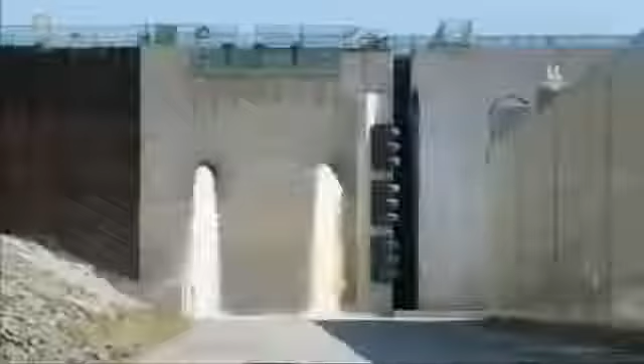Your next vacation may be spent in a paradise you've never heard of. You'll just need a way to get there. Here's the catch. That way has to go underwater. It would become the deepest immersed highway on Earth. Oh, they also have to build a couple of bridges. And did we mention the typhoons?

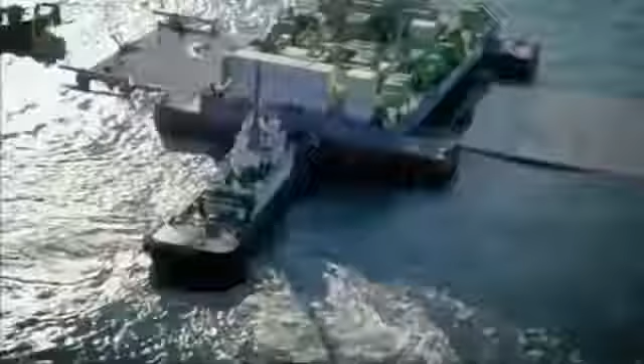These tugs are towing a contradiction. A tunnel segment that's both colossal and fragile. Come back, close. Slow down. A raft of techno breakthroughs and untested results. Bound for a place few know, to entice the world to visit. And even sway the choice for the Olympic Games.

Busan is South Korea's second largest city. 4.2 million people. Bigger than Madrid, closing in on Milan, and as hectic as Manhattan. South Korea is an Asian tiger, and Busan makes it roar. Its skyline will soon include one of the world's tallest buildings. It's the nation's biggest port, and the 5th busiest in the world.

Every 3 seconds, they unload a container. It's so busy, they had to build the sprawling Busan New Port. And still, Busan grows. Busan is such a comer, it's bidding for the 2020 Summer Olympics. But Busan has one big problem, and it's on display here at one of Asia's biggest fish markets. Dozens of vendors cram in here, 14 hours a day, every day of the year. And that's the trouble with Busan. It's so crowded, it's running out of room.

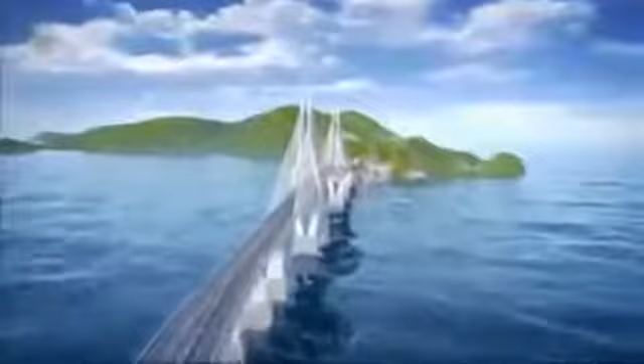The Busan-Geoje Fixed Link. A 4-lane highway that runs nearly 50 meters beneath the sea. Then it leaps across 2 colossal cable-stayed bridges. Altogether, longer than 80 football pitches. One of the biggest infrastructure projects in the world. Plunging 48 meters below sea level, the link will boast the deepest immersed roadway in the world.

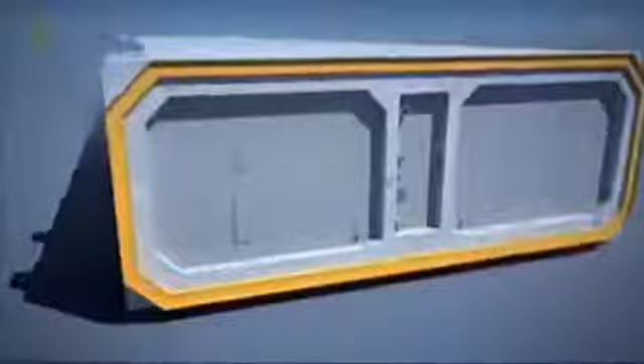The tunnel will be composed of 18 mammoth segments, each as long as 2 football pitches and as heavy as an aircraft carrier. Wide enough to carry 2 lanes of traffic each way, with an access tunnel between. That's the concrete reality. Now, here's where it gets dicey. Each segment has to be carefully towed into position, then carefully sunk to the seabed. And all the segments have to align within 35 millimeters, less than a thumb's width.

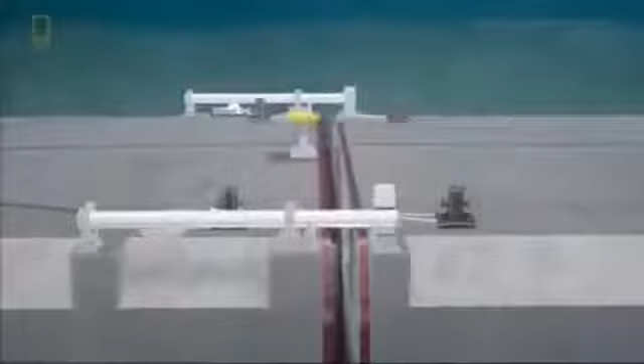Weather adds its own demands. This site is exposed to the open sea. There are always high waves, and the water is deep as well. It is wide open to the Northwest Pacific Ocean, so we have extreme exposure conditions for the construction period. So we've got to be ready for whatever that sends us, like big swell waves, strong winds, and even occasional typhoon.

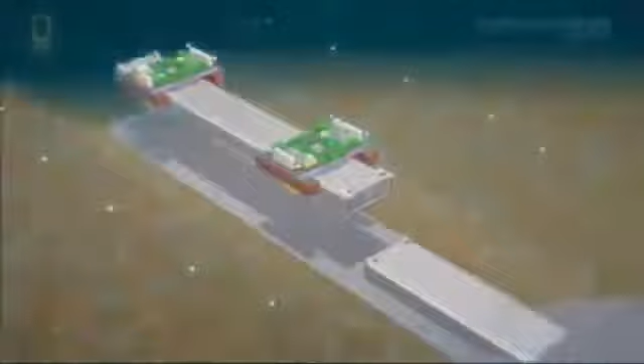Building a tunnel like none ever seen will take techniques like none ever tried. Yet the Koreans have never built an immersed tunnel. But this country has. The Dutch have 5 centuries of experience at holding back the sea. De afzinken van tunnels. Tunnel immersion is actually a Dutch speciality. If you look at the number of immersed tunnels in the world, most of them are in the Netherlands.

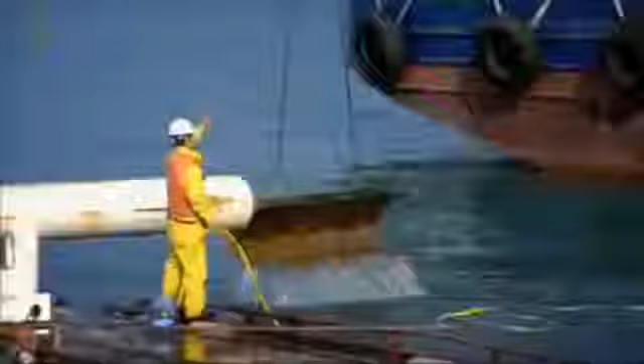Construction begins with the tunnel entrances. One on Gaduk Island, the other near an uninhabited island. From here, engineers will dig down to 12 meters below sea level to meet up with the undersea tunnel segments. But they won't tunnel through the seabed itself. If they did, the gradient would be too steep for driving. Instead, Peter's crew will lay prefabricated tunnel segments on the seabed.

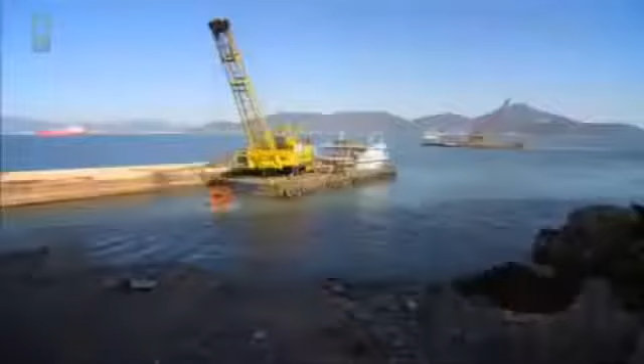First, engineers dredge a trench where the tunnel will rest. To buttress the foundation, they bore concrete columns into the seabed, stopping 3 meters shy of bedrock. The reason? Earthquakes. Avoiding bedrock will give the tunnel crucial flexibility. The segments will rest on a bed of gravel to ensure an even surface.

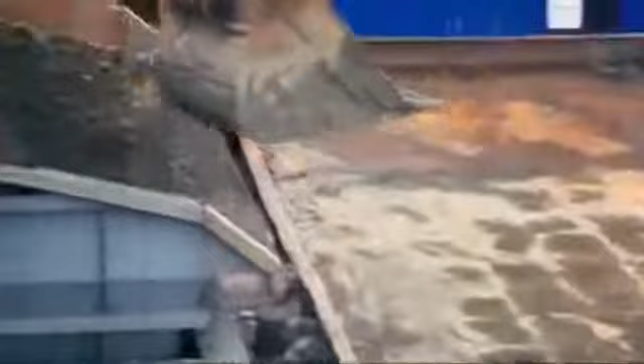Because the bed determines the exact height of each tunnel segment, the gravel must be placed with pinpoint accuracy. Later, the entire tunnel will be covered with thousands of tons of crushed rocks to protect it from collisions with ships or anchors.

Because the tunnel segments will be prefabricated, the first challenge is finding land for a construction yard. Not an easy task in Busan. If you look around, there's not a single metre of flat land anywhere that a contractor can use as a base for the construction period. From the tunnel site, the closest spot lies 35 kilometres away. It's big enough to build up to 5 tunnel segments at a time.

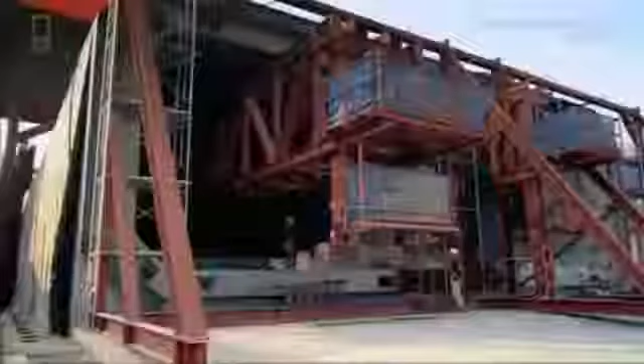Each segment weighs about 48,000 tonnes and is made of 8 subsections, each twice as long as a London bus. Anyone with a basement knows water can penetrate concrete joints, potentially disastrous in an underwater tunnel. But each giant section is cast without a single joint, thanks to Korean ingenuity. We continuously poured full sections from the ground up to the top of the walls to eliminate gaps in the walls. A process lasting 24 hours.

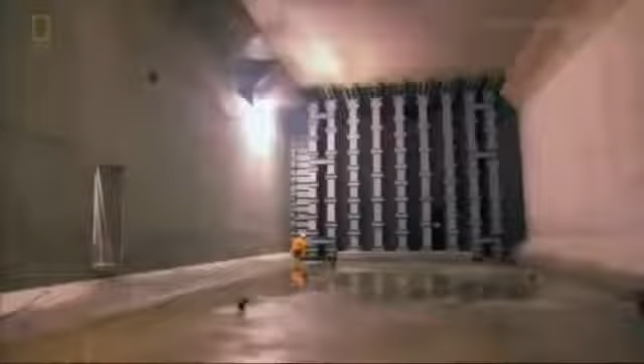After casting, the ends are sealed with steel bulkheads, a Dutch innovation best appreciated later on the bottom of Jinhae Bay. The bulkheads are watertight because these babies are about to take a bath. Flooding the dry dock will allow them to float the segments out to sea. The inundation of the dock takes approximately 48 hours.

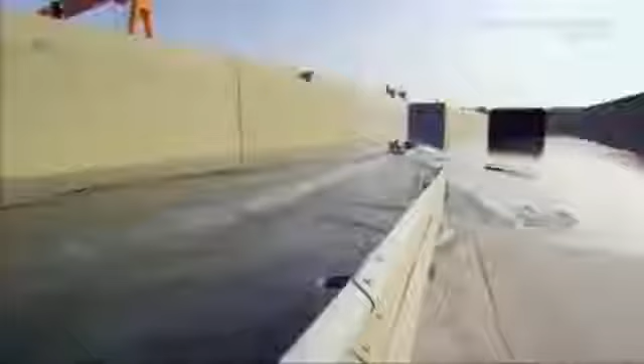During the first phase, we let in water until it reaches the level of the bulkhead door. Then we'll check to see if the bulkheads are leaking. Once all the leaks are repaired, or if there are no leaks, we'll fill up the dock completely. It's enough water to fill 230 Olympic pools. So how do you prep 48,000 tons of dead weight to float? Inside every tunnel segment, there are 6 ballast tanks, and they're filled with water.

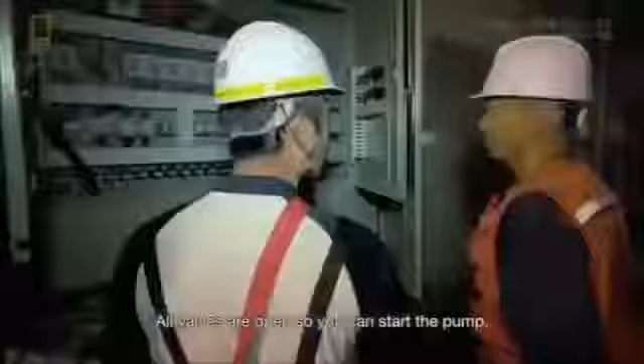To start the flotation process, we begin pumping out the water. We continue until the tunnel segment starts floating. So what the tugboat has to do is to tow that slow. Then with the other winches at the backside, we control the tunnel element sideways direction. Now they can begin to warp out the segment. Removing the first segment takes brawn and finesse to avoid colliding with the dry dock.

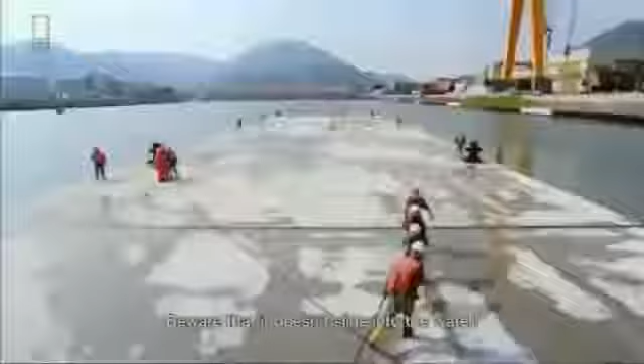With barely 2 meters on each side, there's no room for error.

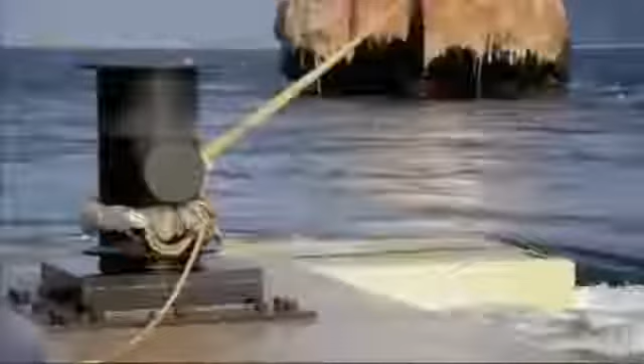Believe it or not, clearing the dry dock was the easy part. While work continues on the undersea tunnel, the rest of the Busan-Geoje fixed link starts to rise. 2 giant bridges. One with 3 pylons, the other with 2.

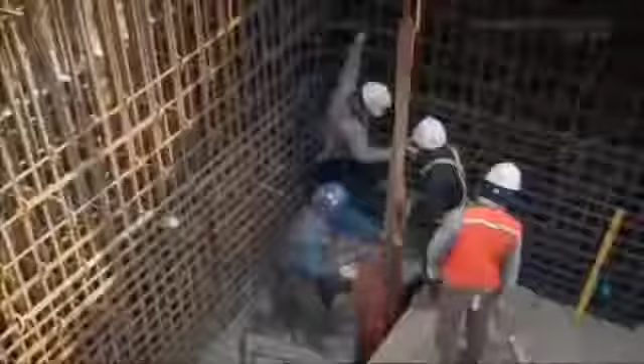At its topmost, the 2-pylon bridge will soar 156 meters above sea level, the height of a 50-story building. The span between the pylons will stretch the length of 5 football pitches, with enough room for the tallest freighters to pass under. Crucial for a city that thrives on shipping for its livelihood.

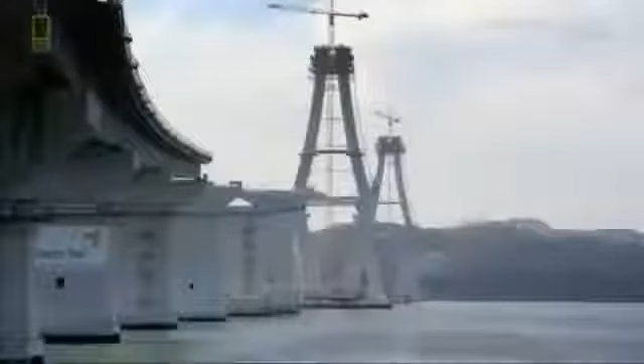The most pleasing aspect of the bridge is also the most daunting. Its curved diamond shape. Of course, curved pylons are very difficult to construct, but they're very much in harmony with the surrounding scenery in many ways, in that they bear resemblance to a mother's praying hands and to the wings of seagulls.

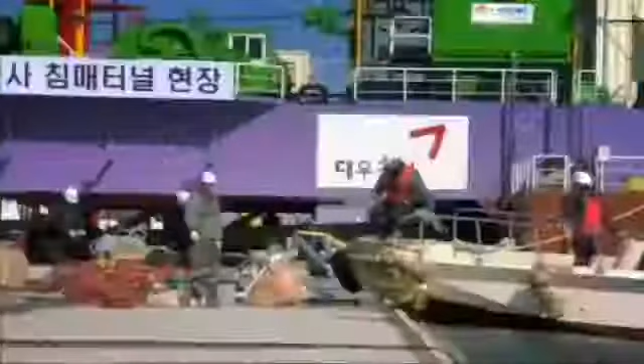35 kilometers away, the first 5 tunnel segments arrive at a temporary mooring site. From here, they'll travel across Jinhae Bay to their resting place on the sea floor, already leveled and lined with gravel. And here's how they'll get there. Pontoons the size of a mansion. Dutch designed, Korean made. One pontoon is positioned near each end of the tunnel segment. After arrival at the tunnel site, mammoth winches on pontoons will lower the segment to the seabed. At least, that's the theory, because it's never been done in the open sea.

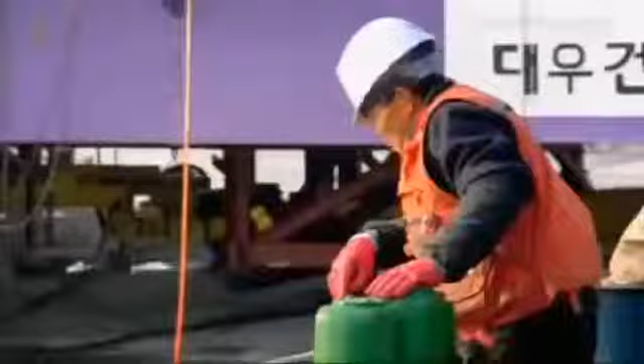A specialist diving team prepares the first tunnel segment for the immersion operation. Divers test connections for data systems and power supplies. Standing by. And remove marine growth from the bulkhead. Down on the wire, please, Steve. Down on the wire. Finally, they install steel wires underneath the tunnel segment, crucial for positioning during immersion. In a good position now, we can come up on the wire. Coming up on the wire.

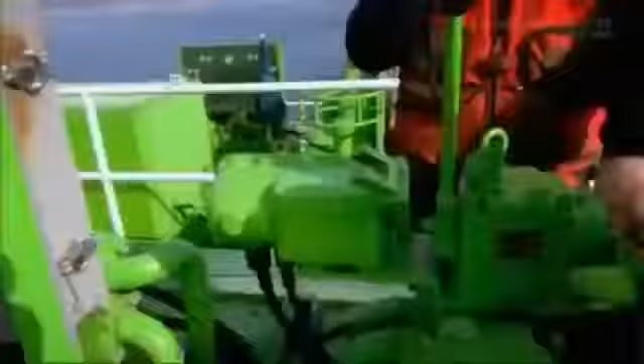Above water, the crew are also adding a temporary access tower, so workers can enter the segment in case of trouble with the ballast tanks. Over, the tunnel is clear. Every problem has to be anticipated, because if things go south, they won't get a second chance. What we do doesn't have anything to do with luck. We know what's involved, we know how the process works, and we have the feeling we control the whole process. Not quite.

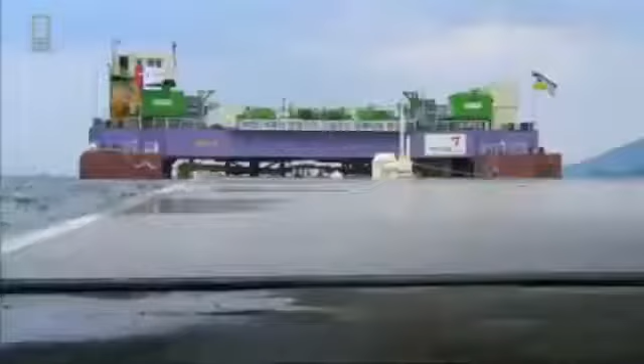Back in Holland, the rest of the immersion team stands by to fly out. In all, 56 men wait for Peter to say go, and he's waiting for a forecast. When the wind blows from the south, swells roll in from the Pacific. Because we're situated offshore, we have to deal with waves. And these waves can be pretty fierce. Even swells barely 30 centimeters high pack so much force they could fracture the subsections that form the tunnel segment. Throughout its journey, the segment will be at the mercy of the waves, so the team needs 3 days of calm seas.

Strukton looked around for a forecaster, but few dared to stick out their neck for such a costly guess. Then, a Danish company seized the challenge. They came up with a model to predict waves as small as 10 centimeters up to 5 days out. A stunning breakthrough in forecasting. That means we're able to say, tomorrow we can do an immersion. And that means we're able to put people on the plane today, really on a last-minute basis. It takes away a big risk for us and for our client.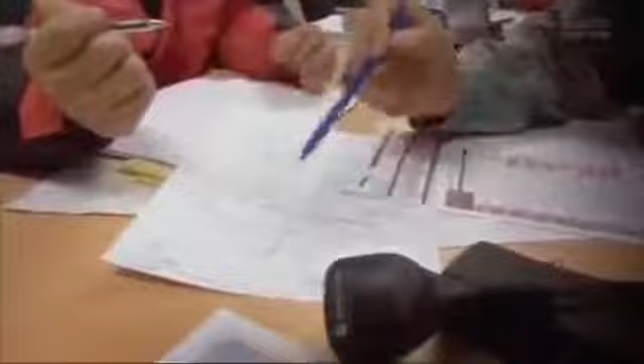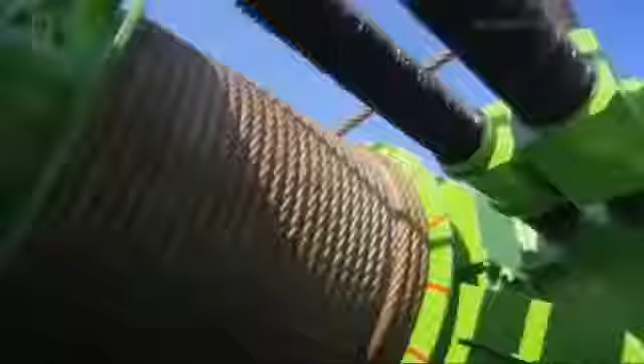We've got the weather. They're all showing the same prediction. The swell still not as bad. I would say we have a go. Green light. We'll try. Then we'll try, right? Okay, thank you. Yes, bye-bye. Ahead lie 48 hours of tension for the boss. Six months of work rides on steel threads and a forecaster's guess. Tonight, no one will sleep soundly.

After a cautious voyage at 3 kilometers an hour, the first tunnel segment arrives at Gadeok Island, the starting point of the tunnel. Joining Peter is the elite team fresh from Holland, among the few men on the planet who can do this job.

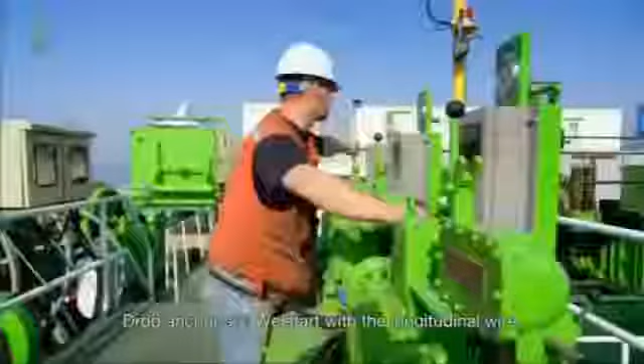But working along shore poses a huge challenge. 48,000 tons have to be maneuvered into a slot with just 1 meter of clearance underwater on each side. One false move and the segment could get jammed in the rocks. Controlling the segment are 14 steel cables, anchored in the rocks and on the seabed. Aligning the segment takes painstaking accuracy. Surveyors take readings using a system of prisms and mirrors mounted on the access shaft and the survey tower. It's all new to the Koreans, so it takes time getting used to the technology.

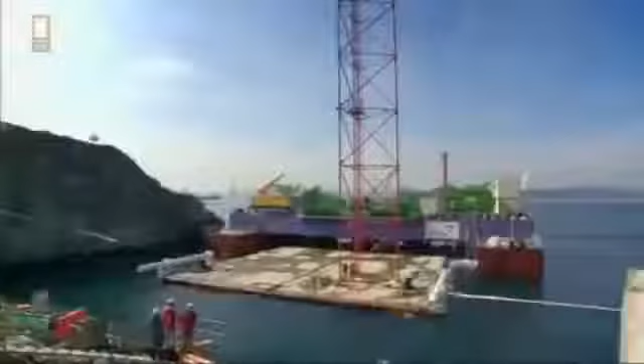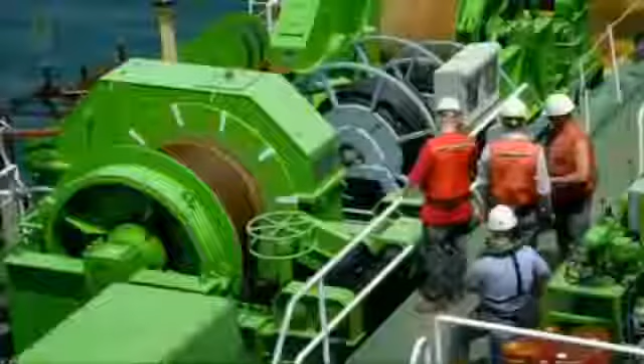The ordeal will take all day and end either with an engineering triumph or a 48,000-ton disaster. With so little clearance and so much at stake, the segment moves at a snail's pace. After a journey of 35 kilometers, it's now just 4 meters from the abutment.

We've worked really hard for a half a year to prepare for this moment. 56 of our people are here to execute this operation. The Koreans are excited and tense because they've never witnessed this. We've done it more often, but still, a very special moment.

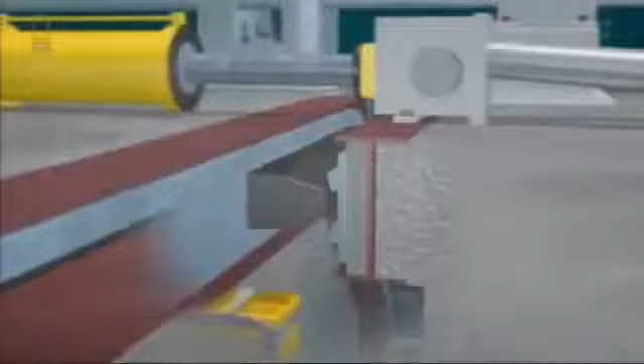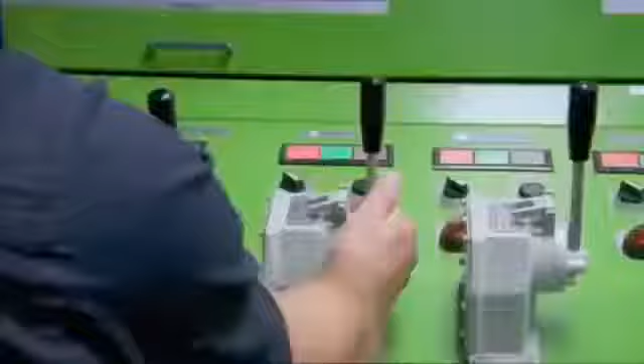Till now, steel plates have protected the leading edge of the segment. Easy down. Behind them is a component as crucial as it is fragile. A rubber gasket to ensure a watertight connection with the abutment. Now they're ready to begin the descent. Operated by remote control, the ballast tanks slowly fill. The command post monitors everything via remote control cameras, on the pontoons and inside the tunnel segment.

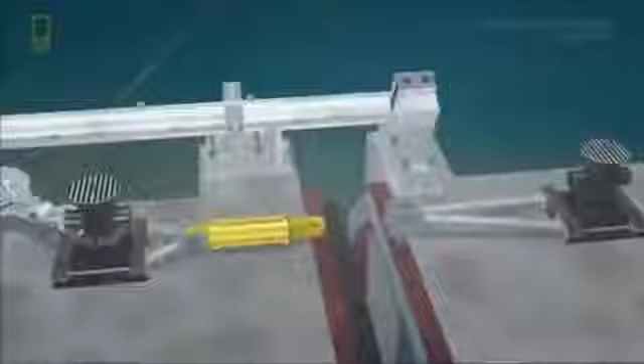7 hours later, touchdown. The segment now rests just 50 centimeters from the abutment, the mouth of the landward tunnel. To close the gap, engineers have installed a pair of powerful hydraulic jacks. Linking the jacks and applying tension closes the gap. The final stage begins from the landward side.

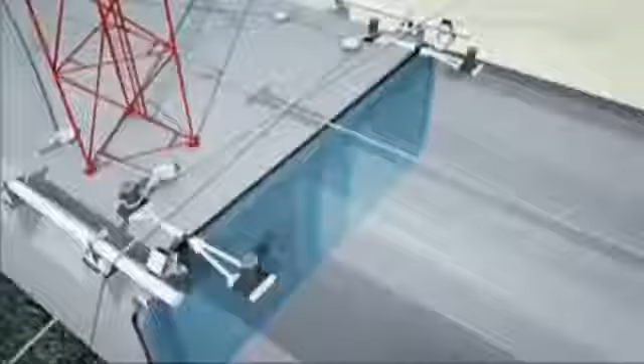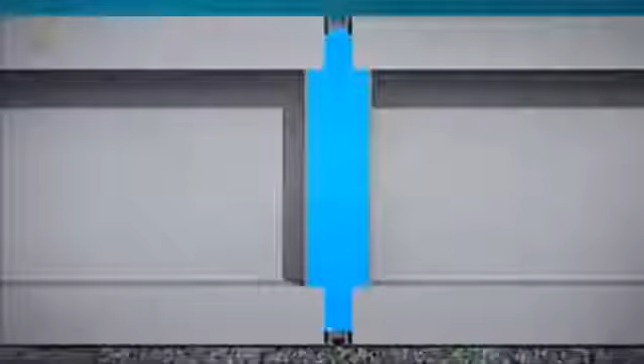A wall of water nearly 3 meters wide separates the segment from the abutment, what they call the immersion joint. Opening this valve will force the water out. As the immersion joint empties, external pressure will further compress the gasket for a watertight seal. The echo from the bulkhead reveals the water level in the joint. With the water drained, they can open the bulkhead door.

But the lock's jammed. You knew that it was going to break? Huh? Did you know that? Because you took the toolbox with you. This calls for cruder technology.

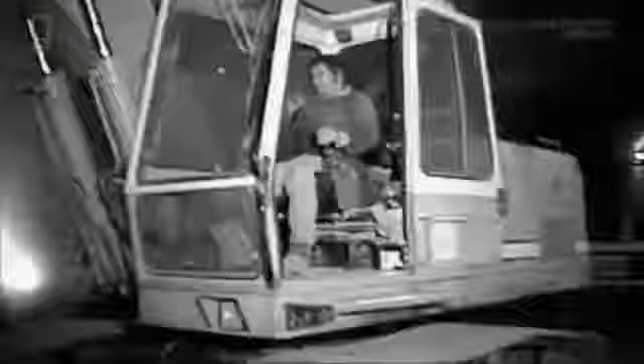All that stands between the crew and the first immersed segment is the steel wall installed back at the dock. And here is why it's so brilliantly simple. On other tunnels, engineers seal the ends of segments with concrete, then knock it out after immersion. But that takes time and creates debris. The modular steel bulkheads are easy to install, easy to remove, and they'll be reused on every segment and eventually recycled. Faster, cheaper and safer. An engineering trifecta. Finally, open sesame.

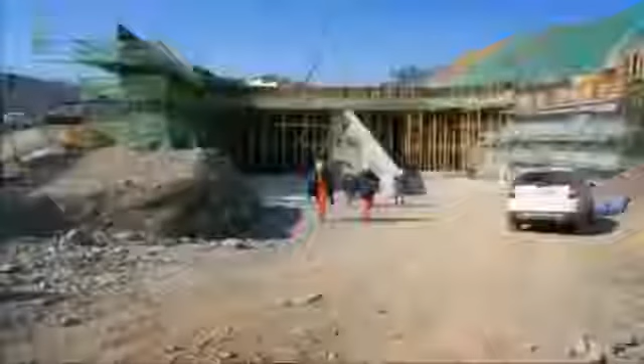Although we experienced some unexpected things, we were very happy that it was completed successfully in the end. And the feeling of accomplishment was indescribable. Their marathon operation lasted almost 78 hours. Some have gone 2 days without sleep. 1 down, 17 to go. And they won't all go smoothly.

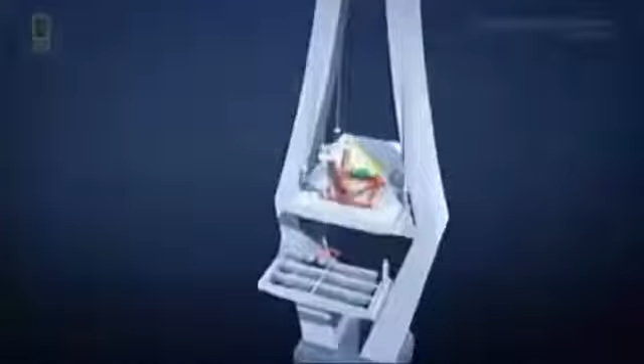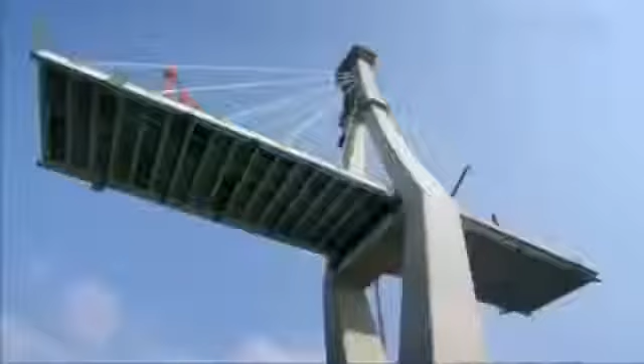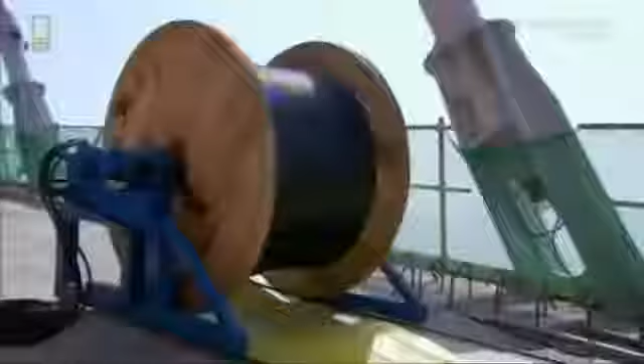Like the Busan tunnel, the bridges advance in segments, but 2 at a time, not 1. It's called balanced cantilever construction. Working outward, steel segments are laid on each side of the pylon to keep the bridge in balance. Then 2 cables are attached to brace the segments. Once they've done that, the derrick crane then lifts up 6 precast concrete panels and places them onto the steel frame. Then put a final post-tensioning into the cables. And we're ready then to start the whole thing over again.

Back at the tunnel, the team have installed 12 concrete segments. But now they're heading for 48 meters, the deepest water and the hardest challenge.

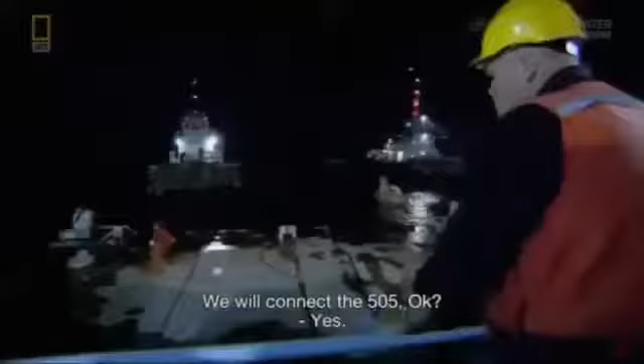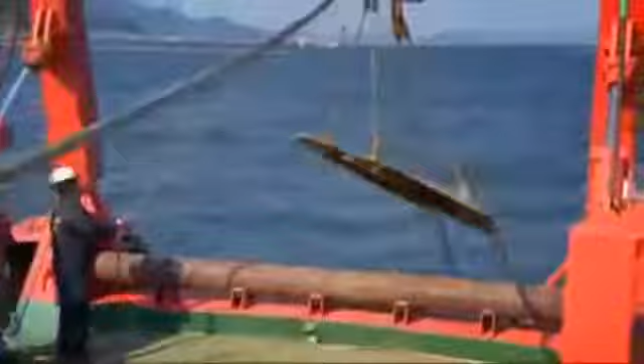The sea floor out here is soft clay, so they need to set anchors that can hold the segment and pontoons fast. Stevmantas, named for their fish-like shape. They're designed to dig in where other anchors lose their grip. Once segment 13 arrives here, 14 steel cables connected to the anchors will hold it in position. But once again, deep water raises the stakes.

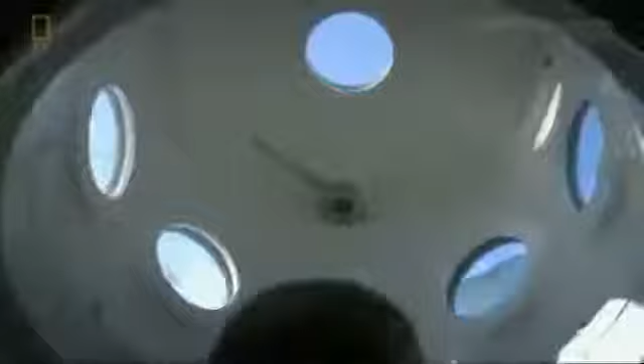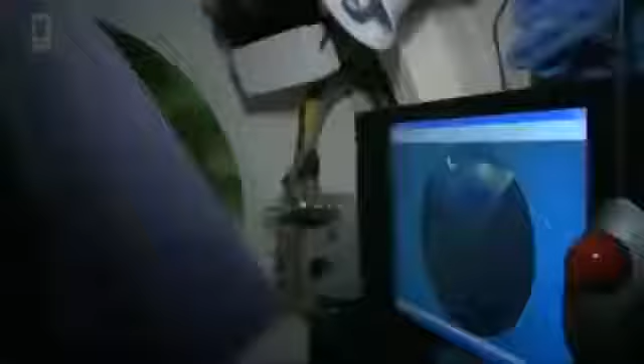Once the segment hits the bottom, suppose a problem arises with the ballast tanks. Somehow, Peter would need to get the engineers inside. On segment 1, they could use an access tower, but not in deep water. The solution is a first in tunnel immersion, a self-propelled diving bell. Purchased in America, the sub was refitted just for this project. We're coming down to 15 meters, see if we can get the tunnel on sonar. This is the tunnel element here. That's probably a bollard on the corner.

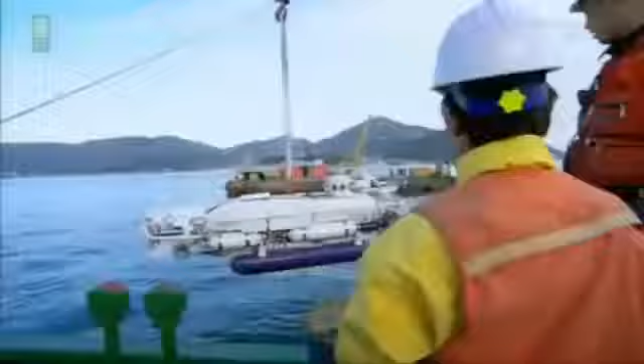With a little boat like this that can go to 300 meters, you've got the concept of a ferry transferring people to the tunnel segment. It's 9 meters long, with room for a pilot, co-pilot, and 5 engineers. It can dock on a landing tower on the segment for watertight access to the tunnel.

Deep water poses another problem. Monitoring the position of the segment as it's lowered, because one misalignment would be disastrous. To calibrate the position of the first segment, surveyors took readings from prisms mounted on the access tower. But remember, there's no access tower here. So once more, the Dutch devise a smart, simple solution. It's named for what it is.

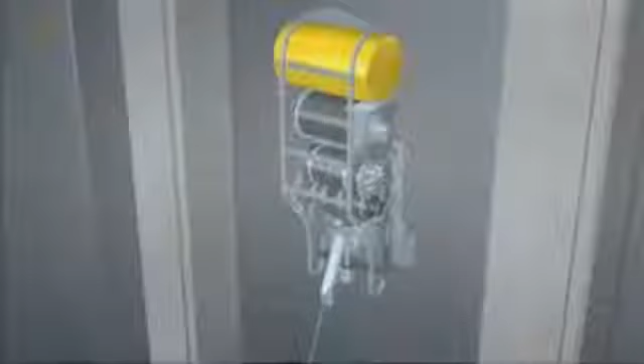A taut wire. One end attaches to the leading edge of the segment to be immersed. The other end attaches to the previous segment. The taut wire ensures the connection stays under high tension. Positioning the device is a delicate operation. This custom-made model is the only one in existence. Breaking it is not an option.

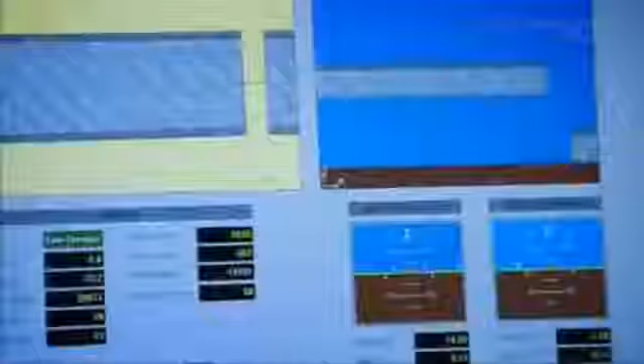When this segment descends, a computer will record the length and angle of the wire, allowing the team to monitor the segment's position. The taut wire is now under high tension between this segment and the previous one. And as the segment descends, the wire automatically retracts and becomes shorter. So that provides us with exact positioning data.

To fine-tune the position of the segment on the seabed, 4 of these sensors are attached, one on each corner of the bulkhead. Another custom innovation for this project. And wait till you see how accurate they are. The whole operation is remote controlled from the command unit on the pontoon. With one click, they start filling the ballast tanks.

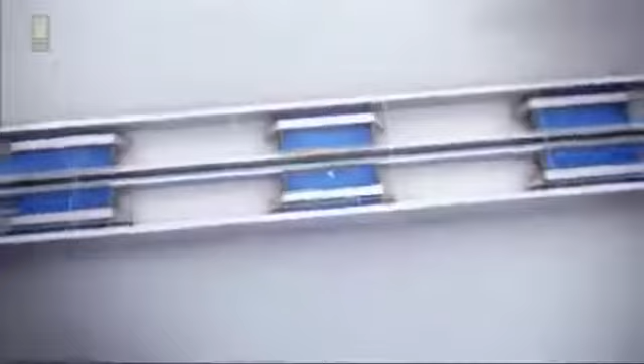You can feel the tension building up now. And then we all have one question. Can we do it again? Can we get it in position? It's the same tunnel, but it's farther away from the coast. It's deeper, the weather, everything. So many aspects make it different every time, so you have to stay alert.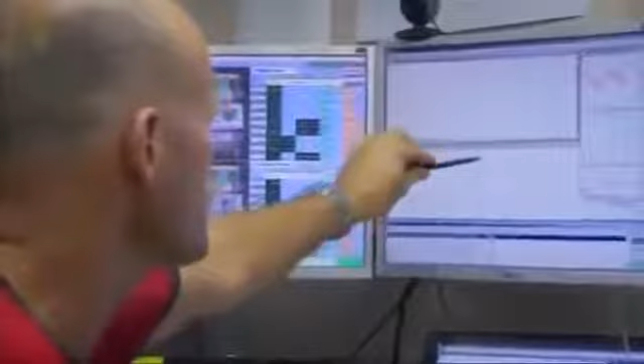All the data feeds into Peter's computer and refreshes the position of the segment every second. This is the tunnel where we have to go to. The green one is the final position, and this is where it is now. So you can see it's just below sea level.

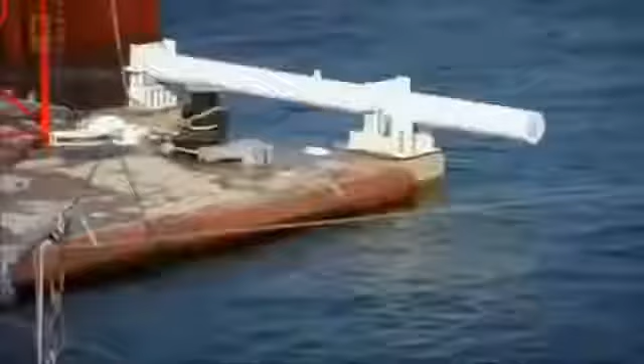The first step in joining the segments poses another challenge and another solution. The moment a tunnel segment approaches the one ahead of it, it's moving because of the swell. So we install 2 guide beams on the top end of the segment. Another simple but elegant solution. The moment we pull them closer together, the guide beams become less flexible. The movement diminishes until the segment is motionless.

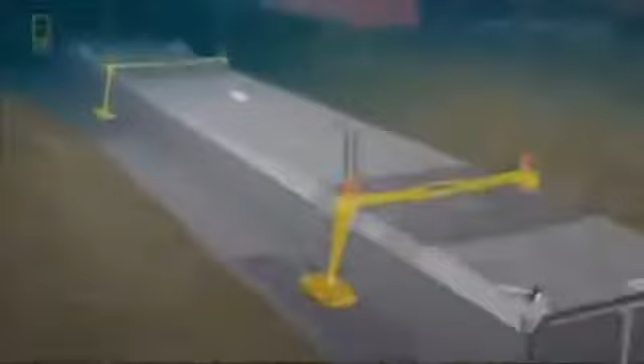With only 50 centimeters separating the segments, and in near zero visibility, a diver connects the hydraulic jacks. The segments seem aligned, yet the slightest error on this end will translate into a big mistake at the other. But the Dutch don't miss a trick.

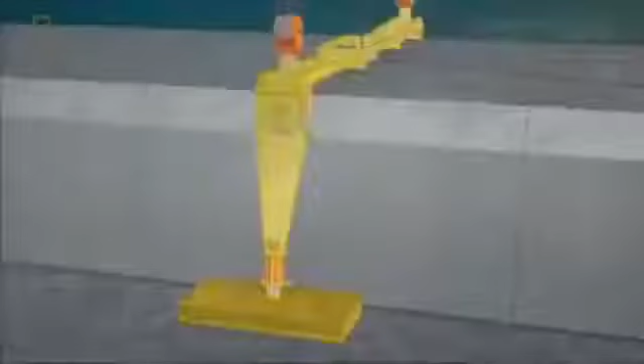Even on calm days, the swell is so heavy and the segment is so long, stability is a problem. The solution? The External Positioning System, or EPS. Yet another Dutch invention based on a simple idea. A pair of hydraulic legs and extendable feet to hold, lift and move the segment.

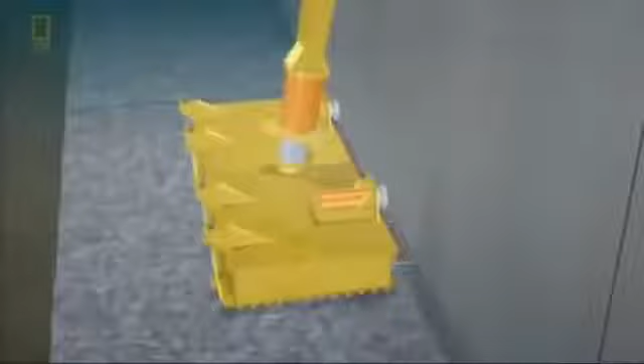Connecting each pair of legs are 4 steel cables, already installed back at the mooring site. Braced on its robot legs, the EPS laterally aligns the segment into its correct position. Now, the jacks are tightened by remote control, compressing the rubber gasket.

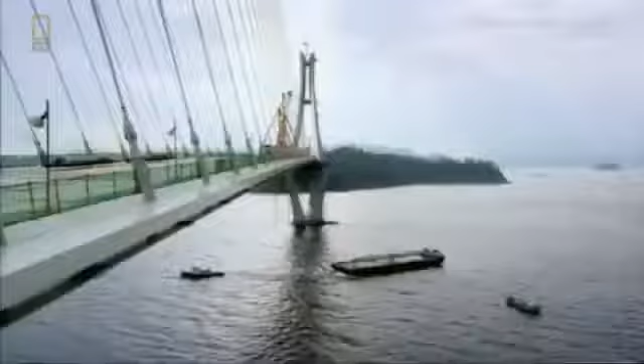Done. One more segment complete. Like the tunnel, the bridges approach the final stages. Before the 2-pylon bridge can accept its last section, engineers have to perform a stretching exercise, as tiny as it is powerful. Both pylons have to be pulled back about 7 centimeters to create enough space for the key section to be placed.

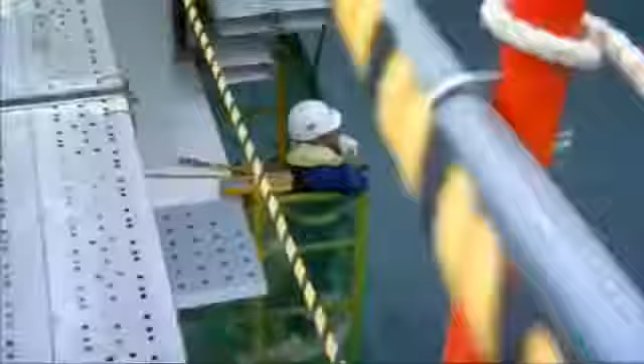Once the tension is released, the final section will have a tight fit. After 6 years, they must be eager to finish. But just like the tunnel crew, they have to move in baby steps. Because this baby is a giant.

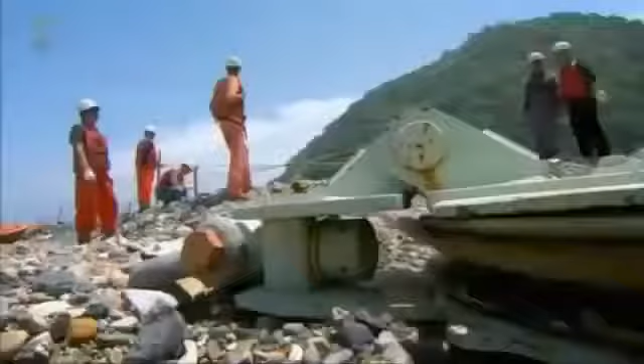A few kilometers away, Peter's crew prepares to install their last segment. Just like the first segment, number 18 has to be maneuvered between rocks. As before, they run some of the anchor lines from the pontoons to the rocks. Because it's so close to the island, it's very difficult to install the immersion wires. Connecting them isn't easy by any means. It's not just a matter of simply pulling them in place.

With all cables attached, they can start maneuvering the segment into place. Because this segment is extremely heavy, we can't afford even a small mistake. Light contact can cause huge damage to the segment, and that kind of damage can set back the entire project. After 3 years, they'll open the last tunnel segment tonight, if all goes well.

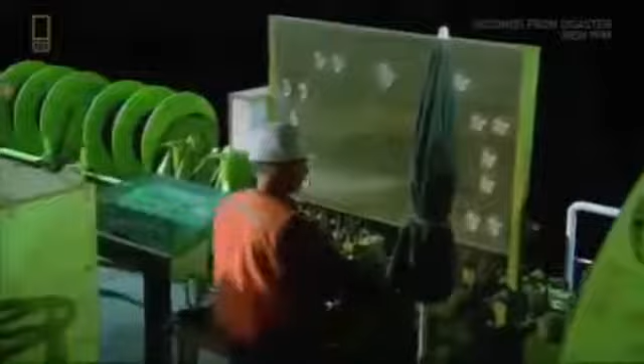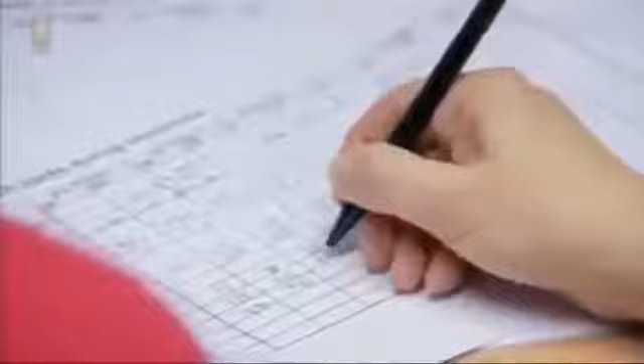The segment hits the bottom, but there's trouble. One end is sitting 28 centimeters too high. We're now trying to figure out what the cause is. We don't know yet. It's a major problem at the moment. We're taking about half an hour to go through all the steps so that we don't miss anything, and then I'll inform you about the situation. The gravel foundation under one of the EPS feet is overbuilt, so they'll have to remove the foot. And the grand opening will have to wait one more day.

After final adjustments, the last tunnel segment now sits squarely on the sea floor. All that's left is entering the tunnel to seal the joint with the final segment. They'll enter via the tunnel entrance on Gaduk Island. It's the last time Peter will make this trip.

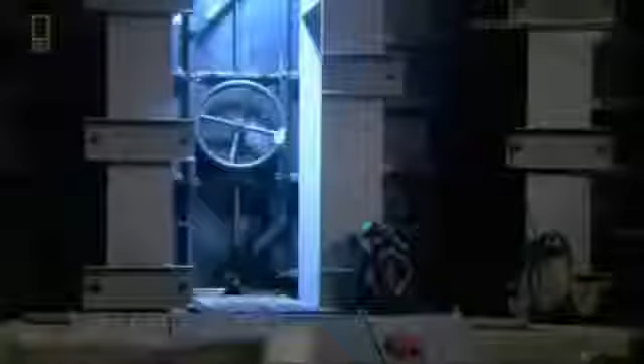They always celebrate this step, but today is the grand finale. Once complete strangers, now firm friends, and soon to go their own way. The end of their long journey lies behind this bulkhead door, and the honor of opening it falls to Peter.

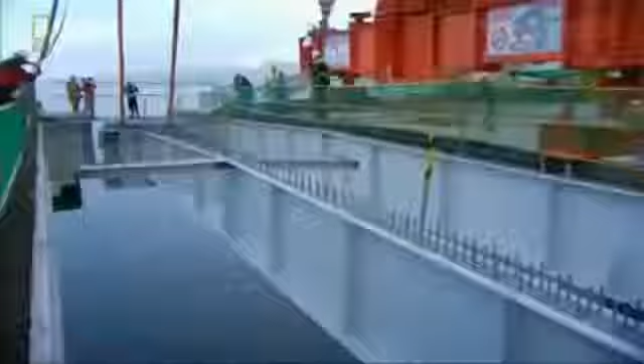Back at the bridge, the final section is lifted into place. Once the tension on the towers is released, the whole structure will be locked in place. With the bridge complete, all that remains is opening the final segment of the tunnel. Last inspection.

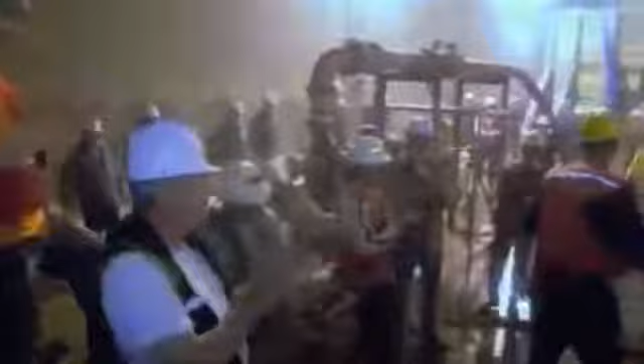Really extremely proud that we did it, and happy, of course. Happy for the whole team. It's just great. After all this time and after a difficult operation, we did it. Very emotional, yes. Fits the moment. And proud. So proud. Yeah. Come back.

For Peter's team, the tunnel marks another success on a stellar resume. For the Koreans, it's a chance to join the Dutch on the world stage. Actually, this was the first immersed tunnel project in Korea. And we developed lots of new equipment, and we trained lots of engineers, and eventually we could finish in time, and everything is happy. This isn't just a shortcut to an island. It's a path to the future.